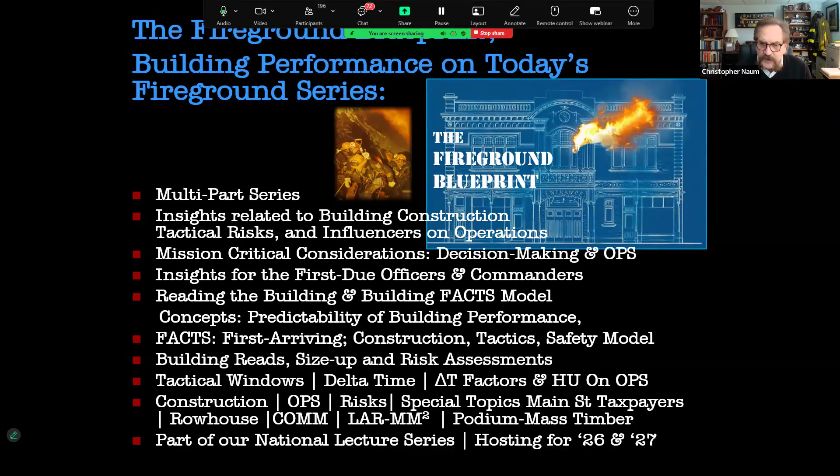Our program here, when we talk about the Fireground Blueprint, talks about building performance on today's fireground. It's part of a very large-scale series, one component of which is reading the building. We get into construction issues, tactics, operations, a variety of insights for both the first due officer and commander. We've developed a number of models dealing with the FACTS model, which we'll explain further.

Reading the building—many of you have become familiar with this concept and terminology. We actually were the first to originate that term back almost 25 years ago, in the late 1990s, early 2000s, when we first started blogging and doing online applications in the early days of social media. We'll talk about the predictability of building performance, and aspects of building read, size up, and risk assessment.

We will touch upon the tactical windows, which everything in today's fireground, especially building performance, revolves around the elapse of time. Keep that in the back of your heads. Integrated with that delta time, we'll talk about the importance of human performance related aspects on operations, construction risks, and other aspects.

Our program is just one very small facet—we're going to scratch the surface in this particular program. But this is part of our national lecture series. The only plug I'll make is that these programs, with a variety of different lengths in terms of time, duration, and content, are available for hosting throughout this year and into next year, '26 and '27.

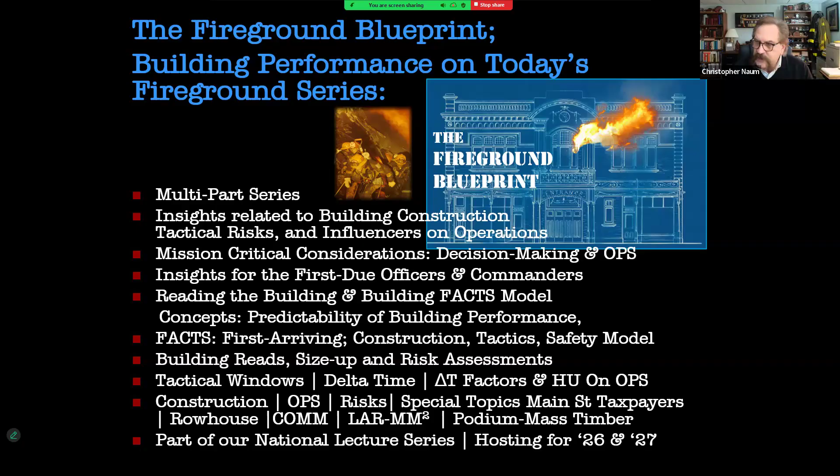Key items here in our overview: we're going to look at an integrated approach toward building construction. I think many of us are familiar with the standpoint that when we do have a presentation—whether an in-service or stand-up program, a conference setting, academic setting, or a drill setting.

Typically we hear the same type of content. The curriculum, the content, the types of things constantly discussed when we revolve around the focused area of building construction are pretty linear. They are not integrated into the other associated areas when we talk about operations, safety, and risk. And we're becoming more familiar with introducing fire dynamics within that model.

This is a very short form program, probably even shorter than I would have liked. We were talking earlier before we started the program—we originally built the presentation around a particular time frame, which I won't say as I look at the clock, but we introduced additional content over the course of the afternoon and expanded the program in a much more sizable way than time allows. So we may jump around a little bit as I monitor the clock as we approach the closing time frame.

We will talk about the aspects of the concept of predictability. I'll say this: all buildings are predictable if we understand the roadmap and the fundamentals drawn out of that. We'll explain how those aspects of modeling have a profound influence on our decision making, both on first arrival at the company level and on the arrival of the command officer who may be assuming command based upon the first due companies that have arrived.

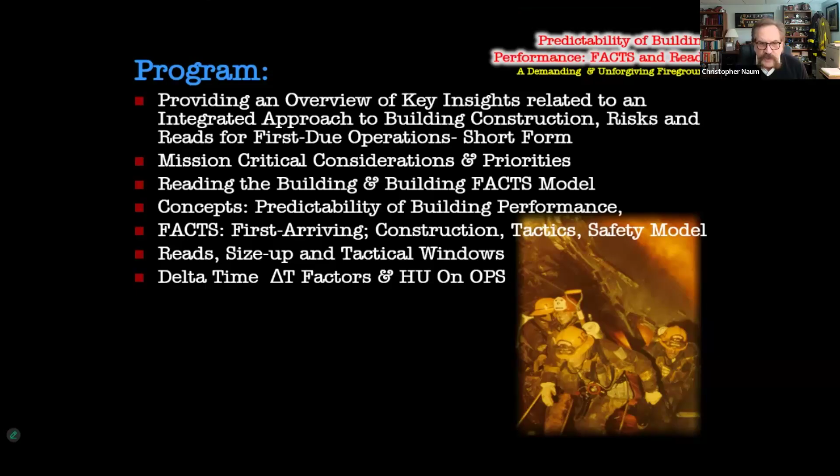We'll introduce elements here when we talk about tactical windows, the elapse of time or delta time, and the integration of human performance elements. Just critical thinking—expand your knowledge, skills, and abilities, and take this as an opportunity to reboot. We're going to talk about aligning and connecting the unique variables and the new perspective of operations, trying to simplify the complexity of the built environment.

One thing that is common when we talk about building construction, it is not certainly one of the most embraced topics on the fireground, but I'll say this, it is the most important topic when we talk about the structural fireground. If we're talking about fighting fires in occupancies and buildings, the most significant influencing factor in our decision making and tactical task level operations is to have a profound level of knowledge and understanding of the building we are engaging within. And I can't say that any simpler.

As I get warmed up here, it is the most important element, and it's also one of the most neglected topical areas within the fire service, and continues to be such when we take a look at all the other certainly important subject areas. But when we talk about showing up on the fireground, the easy thing is showing up, going to work, and stretching the line. The difficult and challenging aspect is doing that with critical thinking, conservative bias, and having both building and fire literacy. I'll talk a little more about that.

So we'll talk about methodologies and processes. And again, we're going to crawl before we run here. There's a lot of immersive information here. We're going to try to connect the dots, and there's going to be some soak time needed to be able to comprehend it.

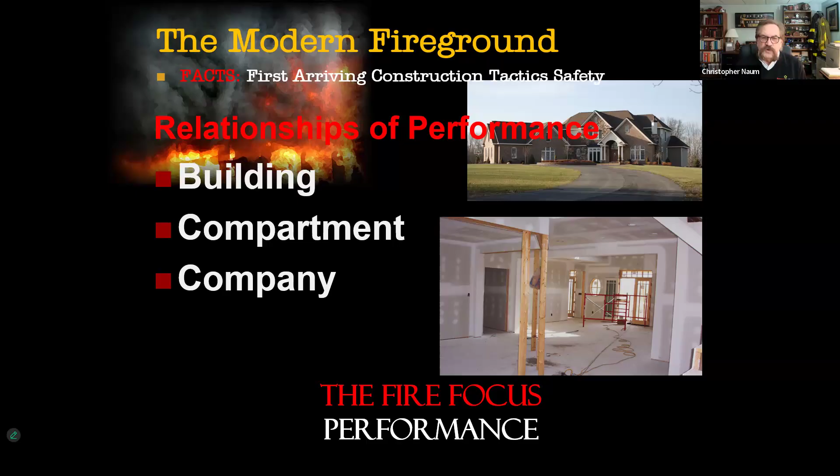And again, if we have consistency, there's a different variable that may be there. But in most instances, we have a tremendous degree of variables relative to human performance and the capabilities of the company. Thus, there's a significant variable that becomes part of what we do, how we do it, when we do it, and sometimes the things we shouldn't be doing on the fireground.

So it's important to take a look at that. And again, just a real quick look at the integration. We talk about the aspects of building performance, the compartment and the company.

All buildings have compartments, and the important other aspect here is the concept of resiliency. We're going to talk about identifying characteristics of the building's RIT. That has nothing to do with saving our own or firefighter safety, but it has everything to do with the predictability of performance of the building, because all buildings have a degree of RIT, resiliency, integrity, and time, the elapse of time, the integrity that's affected by fire, and how that plays out in some of the learned attributes that are part of that particular component.

The compartment is where we typically go, whether it be an occupiable type space or an internal compartment that may be a void or concealed area. Those are typically the location in which we have fire dynamics or products of combustion present. It's where the company goes, where we have engagement. And again, company, capabilities, resources, and risk. Those are very important concepts that we expand upon when we put these things together.

So when we talk about those elements, it's building, compartment, fire dynamics, fire conditions, three critical components of building, compartment, fire, and company.

When we talk about the aspects of the compartment, it's also important to note that many of you have become familiar with the perspectives and reads of the compartment and of the fire when we talk about reading the fire or reading smoke. This was an introduced concept that Chief Dodson was very gracious to identify and correlate, and then develop the modeling, and that has become a critical aspect relative to a fireground read. But we've expanded upon that.

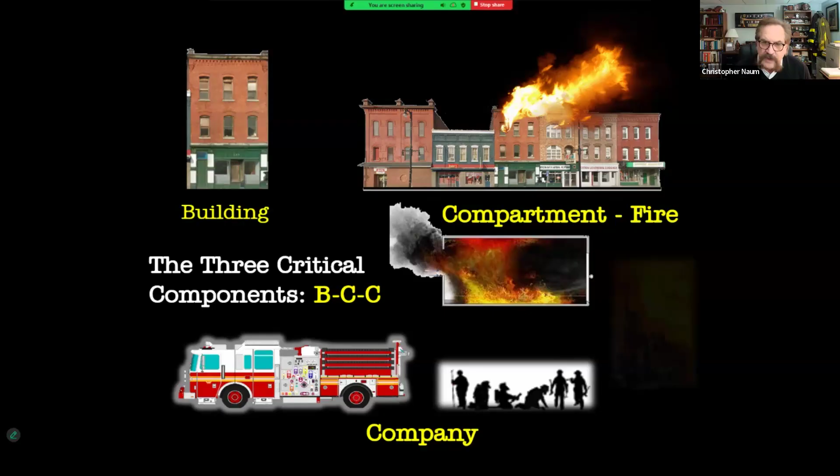When we expand upon that and take a look at how it plays into our building reads and risk, the other element here, part of the predictability of building performance, is the acronym BEAR: building anatomy, era, and vintage, the anatomy of the structure relative to a variety of different subsets, and the risk factors, the compartment fire conditions, the RIT, resiliency, integrity, and time.

And also the incident, severity, urgency, and growth, thus the acronym SUG. It's a simplified aspect to take a look at the conditions we are encountering upon arrival, the conditions we are projecting, and sometimes trying to postulate and predict based upon where this condition may be relative to the fire within the compartment, fire within the room, fire within the floor, fire within the building, or the expanding nature of that incident into other structures and occupancies that may be part of a larger footprint to the building.

Simplified aspects of building integrity, structural aspects allow us to operate in, around, on top, next to, or underneath the building, the aspects of RIT. There is compartment RIT, there's also building RIT. And again, severity, urgency, and growth, which we'll expand upon as we get into the program.

Company level knowledge, skills, and human performance, and then the aspects of time when we talk about RIT. Everything on the fireground has to do with the aspects of fire, products of combustion, building integrity, predictability, performance, as they relate to the elapse of time and our integration in that operation on the fireground.

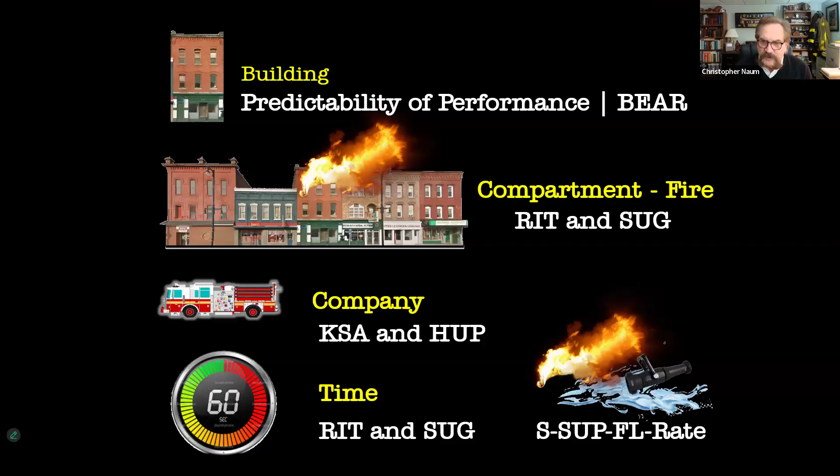And then lastly, the other aspect which is critical when we talk about fire suppression is the sustainability of having the adequacy of flow rates, when we talk about controlling the compartment, controlling the floor, controlling the building. So those relations are pretty straightforward. The building compartment relationships sometimes can be vague, or sometimes when we take a look at those factors, we can understand them very much so.

So something as dynamic as this, let's take a look at just a very quick video clip of a compartment fire, of a building fire, fire dynamics, the aspects we are learning more about in terms of the dynamics of fire, inlet, outlet, exhaust flow paths, and so forth.

We talk about the fire load packages, the building fire load, all of the other aspects that come together along with occupancy type and occupancy risk—another concept to introduce. So it's not just a residential occupancy; that residential occupancy may have inherent risk factors associated with other attributes we'll talk about here today, as dynamic as what we're witnessing.

When we talk about the dynamics on the fireground, whether older types of structures have a dominant resiliency and integrity over time, they allow us to do some things that were not time dependent. Sometimes we don't need a tremendous degree of knowledge beyond identifying the building, the type of construction, and other attributes relative to its building anatomy. We recognize certain fire dynamics conditions showing, and we normally put that together through varied levels of experience gained.

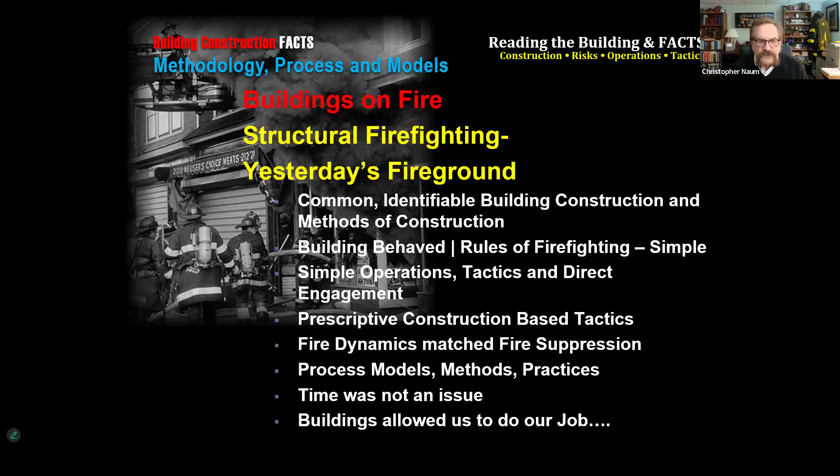Time was not an issue. Buildings allowed us to do our job. Personnel knew and did their jobs - proficiency, rigor, mission above all. Simple technology, manual brute force, physical exertion, determination - it was all about the job. We had time, we had people. We could mess up and still be alive. We could have errors and omissions and not know the job, and still get away with it.

We were slow to change. Change was discussed, debated, vetted, accepted, and then implemented. We embraced tradition while we were making it.

Today's fireground involves not only construction but building anatomy. This goes well beyond just the fundamentals of the five building types, and well beyond building construction. We're talking about building anatomy and all the attributes that go into that - the elements of functionality and the integration of those into this five and five.

I'm reinforcing how this is going to come together. These influence our operations, our tactics, our degree of engagement, and have an influence on civilian life safety. There's occupancy use and classification.

There's also occupancy risk. Recognize that a vacant building is nothing more than an occupancy use classification, which may have varied levels of risk associated with it. Once we identify, comprehend, and look at the other attributes, we can identify the levels of actual or perceived risk and determine our incident action plan and go to work.

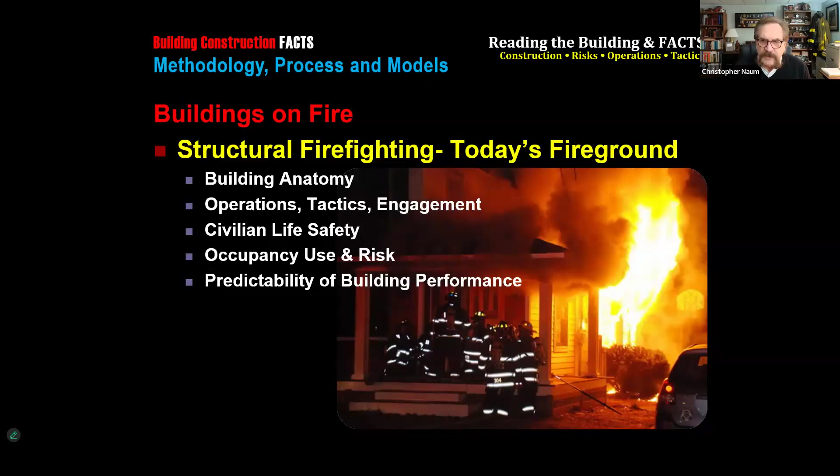These are things that once we identify the factors of predictability, they become our astute and defined roadmap that assists us in reading the building and figuring those things out relative to size up and operations. It's looking at fire loads, rate of heat release, understanding fire dynamics, the variables relative to engineering and architectural construction, the methods and materials of construction that constantly change, and sometimes the cost factors that went into that particular building that directly correlate back into other risk factors.

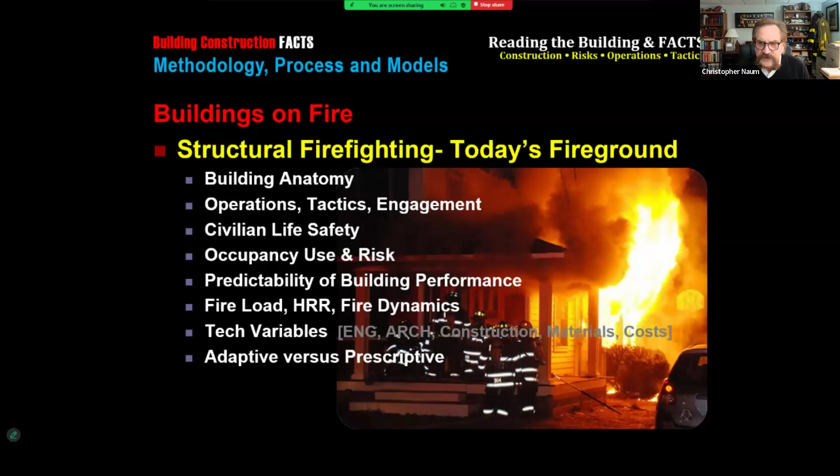We have to have a much more adaptive versus prescriptive perspective, and then the integration of process models, methods, and practices that work for your community.

So there are some elements here that are very definable, present in an urban or metro environment, in a first due, part of a battalion, division, borough, or entire city. But there are also things that are specific to defined risks that are part of a rural setting, either in the middle of nowhere or that four corners stop sign or single traffic light, in the suburban, urban suburban, outer wildland areas, coastal, seaside areas, all the way up to our urban and metro conditions.

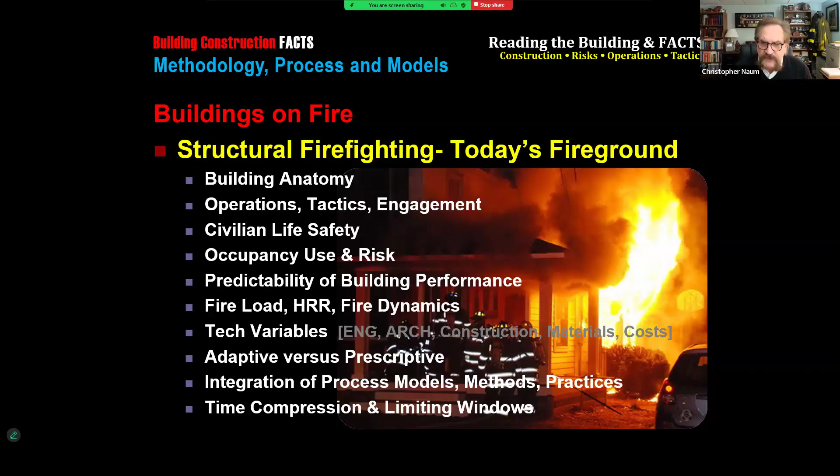Time compression, limitation factors, and the performance demands of our fireground. Yesterday's fireground versus today's fireground, we talk about those aspects. This is not the fireground or the fire service of the 80s, 90s, and certainly not the early 2000s.

When we talk about some of those demands and relationships, we talk about lessons, learnings, and insights, the historical context, the biases. These all have an influence on our conditioning and tactical reflex, whether it be correct, faulted, or inaccurate. But it does cause us to pause and take a look at how we've been trained, what we've been conditioned to, what kind of buildings we typically fight fires in, and what has been their resiliency and integrity, how much time have we had—is it unlimited, is it very narrow?

How does that relate back into the methods and materials of construction? How does it relate back to our size up? Is it cursory? Do we just follow a couple of bullets and go through the motions? Is it pre-programmed based upon our SOPs? Is it pre-programmed based upon the expectations of the fireground that we just do something, say something, and go to work as quickly as we can? Or are there meaningful and value-added insights that we are looking at beyond the cursory view of a building?

Yeah, it's a 2.5-story wood frame, but what about that 2.5-story wood frame? Are there additions? Are there add-ons? Is there something there that by age and deterioration, or additions, alterations, or exclusions, is going to be paramount and mission critical to what I may be doing on that fireground in the next 10 minutes? So we've got to take a look at those elements.

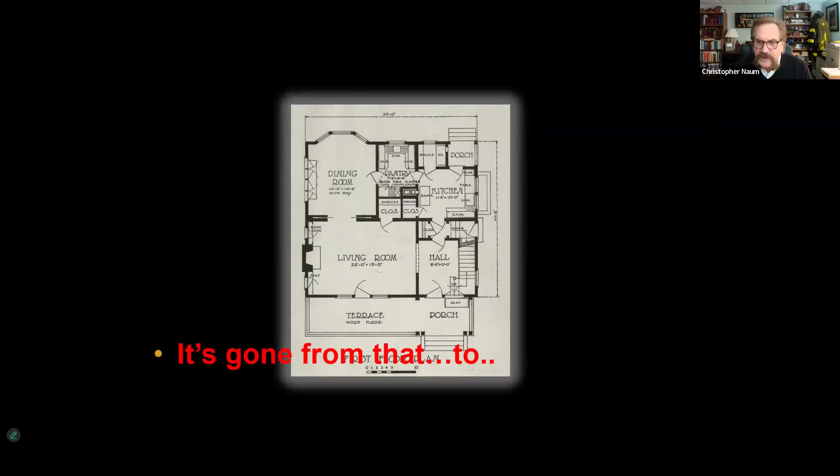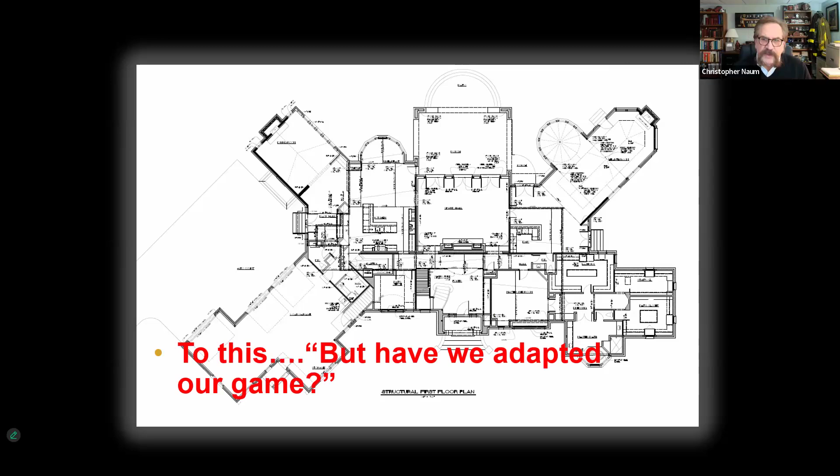When we take a look at the footprint of a building, at compartmentation, something that's pretty simplified and direct, it has become more complex. But have we adapted our game plan, our template? Do we have an understanding of how that plays out relative to our Fireground blueprint, our building anatomy, and also our building reads?

Just a couple of quick items. This is taken out of our mega mansion class that we do on mega mansions and large area residentials, but even just the evolution of the simple world of our buildings: 980 square feet back in the 50s, all the way to the common square footage and footprint of a residential of 3,200 square feet today. Many of you may have certainly much more sizable residential structures.

Just to give you some correlation, if we can classify, if we can identify the predictability based upon the anatomy of the building and other attributes that are part of the design, the construction, and the regional characteristics and conditions that may be present across the U.S., guess what? We can also develop the tactical template. We can identify the footprint, and then develop efficiencies in our building reads, identifying those conditions that are going to give us more efficiency on the Fireground.

So again, single family residence, the common ranges of 4 to 6, the upper ranges of 7 to 9. We can also tie that into what's called mini mansions. The McMansions primarily are within the criteria of the era of the 1980s when they were first introduced, and they were common to the 3,000 square foot footprint. Today, around the United States, there may be some differences, some very regional-based attributes of around 4 to 8.

Large area residentials may be commonly between 4,000 and 10,000 square feet. The mini mansion from 4 to 8,000 square feet, very regionally based. The mansion in its truest sense, based upon the federal estate taxation code, is between 11 and 25,000 square feet. And then we've introduced the concept of mega mansions, with attributes found between 25,000 and 50,000. The giga mansions between 50,000 and 75,000. And yes, there are tera mansions and greater around the United States, 75,000 to 100,000 square feet.

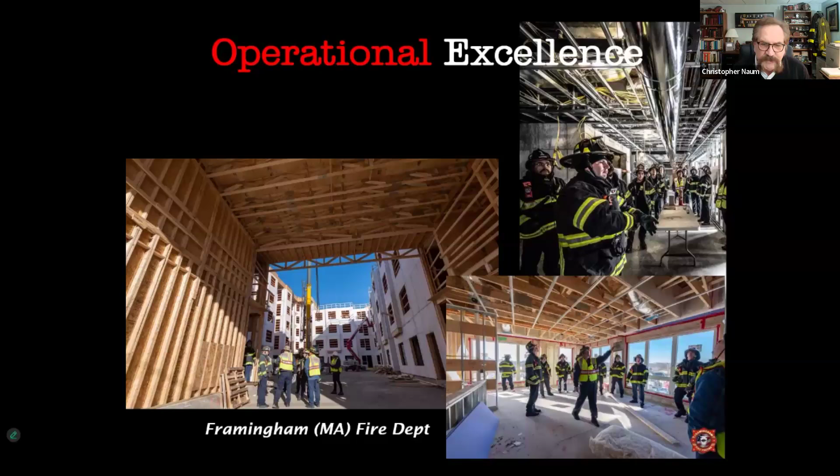Our good friends in Framingham, Massachusetts, again tremendous good leadership, taking our companies out there. We've worked and collectively seen some of the results of building knowledge and literacy by engaging in that type of environment and putting that all together.

Understanding intimately the built environment, the fire phenomena, integrating the elements, having technically accurate information, pre-fire planning. But again, it's at all stages, guys. It's understanding as the foundation and the construction sites are being built, all the way up through the various construction stages, inclusive of occupancy throughout the lifespan of the buildings.

All buildings are predictable if we have a model and understand the performance indicators that we are now introducing you to in this particular program. All buildings have a definable insight and focus when we talk about performance indicators. It's an understanding of the building's anatomy, understanding if we're looking at the structure and I ask the question: give me a type, tell me what the building type is.

Hopefully many of you are going back and forth between a building of type 3, brick and joist, or ordinary construction, or a building of type 4 construction. So if I was also to say that there's a new type 4 construction today that is part of the International Building Code, the International Fire Code, that identifies a modern type of type 4 that doesn't represent or look anything like our older legacy type 4 construction, dealing with cross-laminated timber or mass timber, you may be scratching your head saying, no, I don't believe it. But yeah, there's an entirely different type of type 4 construction now introduced that also leads to a hybrid type of structure.

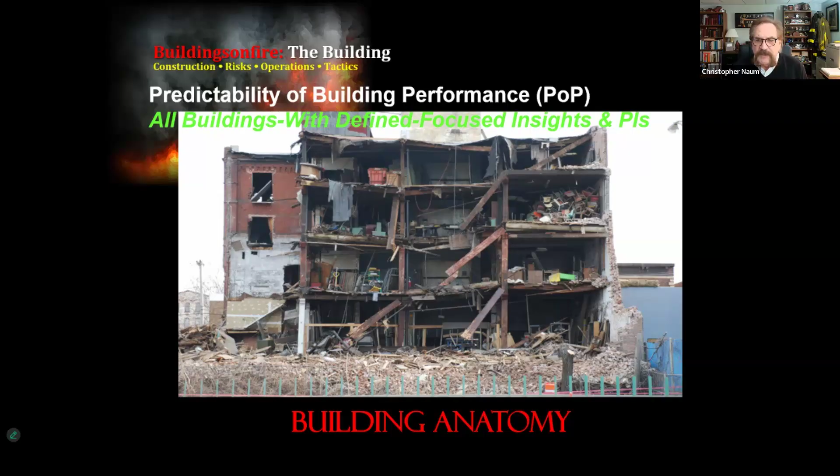So again, we go beyond the fundamentals of the 5 building types, understanding the building's anatomy, understanding and being able to look at a building and understand how it's constructed as this image is depicting, and being able to look at the building in this type of condition to understand that this is what's behind it. Understanding the anatomy, the construction, the materials and methods of construction, and then relating that back to how this building is affected by the fire dynamics, either identifiable on arrival, showing up on our reads and size-ups, or the things we discover that may be deep-seated based upon the footprint of the building, or within one of the critical aspects of the building, within the concealed spaces or voids of the structure.

Remember that part, because that particular element, concealed spaces and voids, is a critical functional domain in the building. We have building conditions that are seasonal, and we've got to be able to look at them during a variety of seasons that may be present throughout your jurisdiction, however long or short, in good or bad or inclement weather, and certainly the aspects between daytime operations and our building reads that are going to be very much present.

This is the obvious stuff, the things that we're going to see sometimes without really looking. So although we are looking, are we comprehending? That becomes much more challenging when we talk about the conditions between daytime and nighttime operations, and also the other challenges dealing with smoke conditions and other obscurity, other environmental factors that may be causing more challenges regarding how can I identify the critical elements of that building.

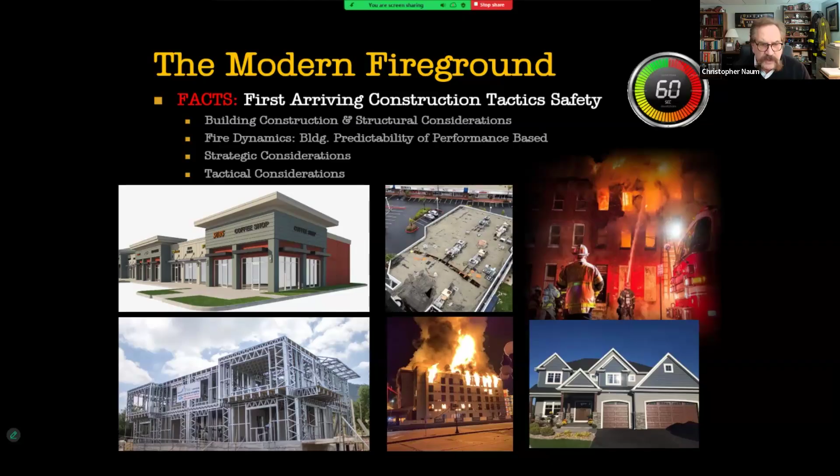When we talk about the variations of residencies, residential, commercial fireground, multiple occupancies, the challenges of operations, and the continuing evolving challenges of fire dynamics in a variety of both simple and complex buildings are creating very dynamic fireground conditions in which we sometimes have no clear definable go and no-go, but gray areas that become part of our size-up, part of our reads, part of our assumptions, and the accuracy of what we're assuming, constantly trying to validate as we go into operations.

In a variety of building types, occupancy types, age and vintage, we correlate that back into the human performance element of the adequacies of our companies. Am I responding with a one or two person staffed company? Dramatically different than going out the door with a 3, 4, or 5 person staffed company. But at the same time, I could have a 5 person staffed company, but the experience level, capabilities, and knowledge may be diminished. It may not be constant across the board, which may play out in terms of what we do on the fireground.

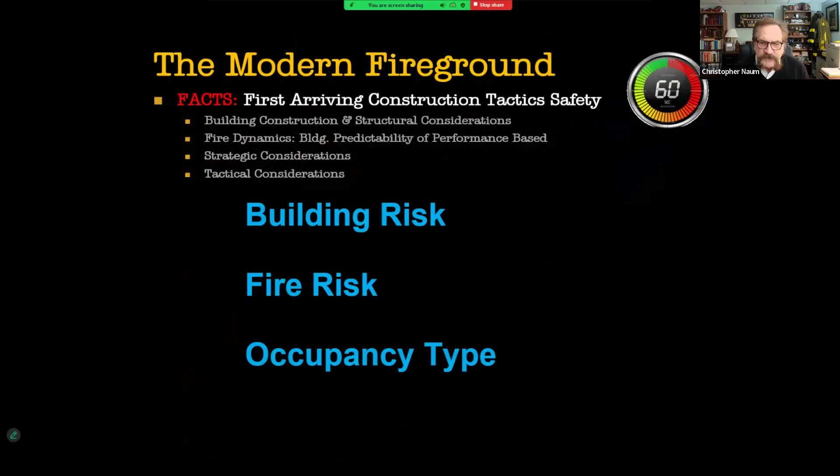And sometimes we do have go and no-go considerations, but we have to identify that. Do we have various types of operational creep where personnel are operating within collapse zones or other conditions sometimes defined by the lack of discipline and rigor present on the fireground and within the operational modes of oversight? But the aspects of building risk, fire risk, occupancy type, and occupancy risk are really formative as part of our operation.

I'll take a moment to give you some insights on the 1932 Fire Chief's Handbook that was published. This was the first textbook written specifically for the fire service. Published in 1932, it talks about the fire service profession, as referred to frequently in recent years. In the broad sense of the term, as practiced by the well-trained modern fire department, it may be so classified.

So again, they talk about the modern aspects. They talk about a number of different attributes, and even in 1932 they first talked about the aspects of size-up. They talked about safety, or life safety. They talked about the first line going interior, and by interior they mean - there's a whole variety of attributes that are written and developed right out of this particular textbook.

Size-up: a quick survey of the situation as encountered by the fire department upon arrival. They identified life hazard, property hazard, but also identified the importance of an initial action plan based upon the first arriving officer, who rests the heaviest responsibilities. They also started talking about type of construction, the development of fire within each type of construction - very specific characteristics - sizing up the building's height, characteristics of construction, and the important aspect of openings and exposure conditions.

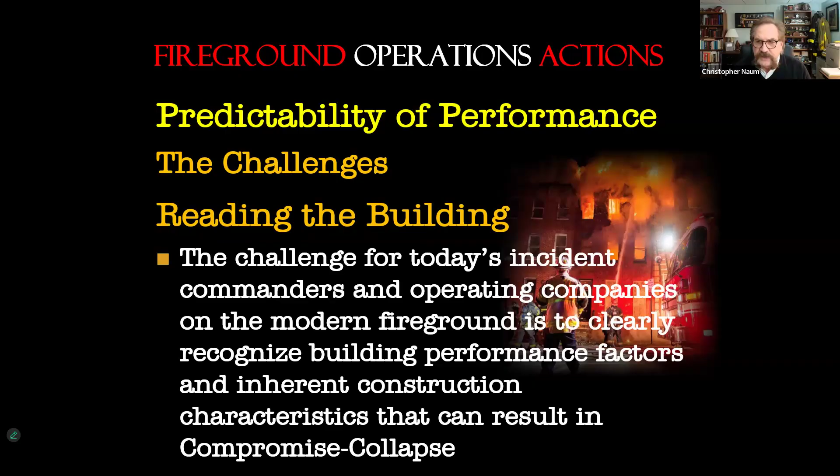Command officers and assigned personnel, depending upon roles and responsibilities, sometimes cannot comprehend the relevancy of observations or communications, or cannot observe mission critical conditions or performance indicators relative to the challenges of smoke, weather, darkness, concealment, obstruction, design, or proximity or location. So sometimes we have both mental and physical obscurity. We don't understand the communication when someone is telling us something because we don't have that degree of literacy. That becomes part of the challenge.

Predicting adverse fire behavior and potential structural compromise or collapse is one of the most challenging tasks facing first-due companies and commanders at a fire. Usually the lack of information on the construction of the building, the fire size, fire location, fire burn time, conditions of the building, the fuel load, etc., makes the task nearly impossible.

However, when key building considerations and fireground indicators are presented, recognized, and identified for their relevancy and importance to the operation and to operational safety, they can dramatically influence operational outcomes. So it's not always impossible, but we've got to develop empirical insights relative to the occupancies and integrate that into our combat fire engagement plans, relating to construction, occupancy, performance, materials, systems, and time.

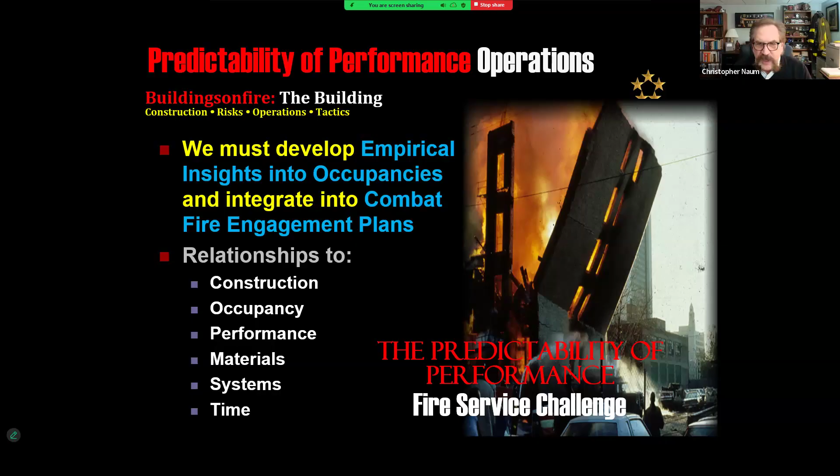So, all right, with that being said, let me fast forward to some of the key takeaways. So when we talk about predictability and building reads, and again, the comprehension, the understanding, the application.

If I show this particular image in fireground operations on the East Coast, I'm going to get a certain perspective. If I show it on the West Coast, of which this is a depiction of fireground ops in a building of bowstring construction, oh my God, the world is ending. We're having some heartache, and some keyboard warriors are having a fit about what are they doing on the roof.

But again, there are predictabilities based upon attributes of the building, the reads, the functionality, the structural elements here, and more importantly, where are they located. So a lot of what's drawn out of risk is going to be based upon where and how these buildings are built in your jurisdiction around the various areas of the United States.

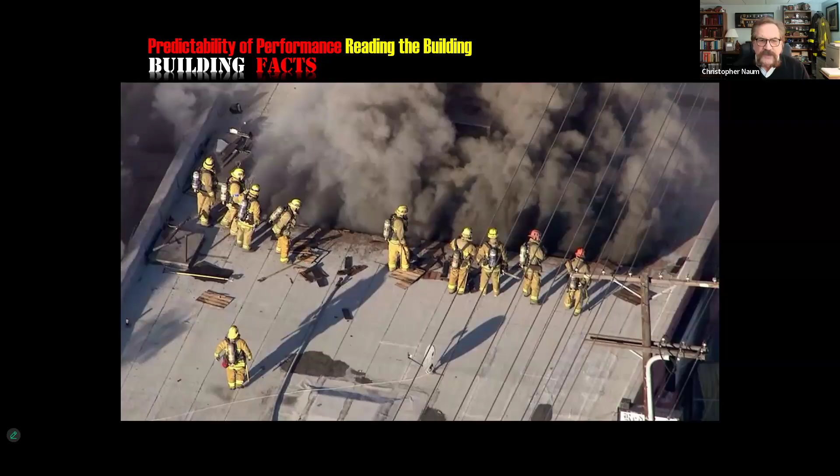So yes, we can perform certain functions in certain locales if we have an appreciation and understanding of the building's anatomy, the aspects of the occupancy, the collapse and compromise characteristics, the methods and materials of construction, and the fire dynamics that allow us to have conditions that are mitigated, under control, and able to save property and hopefully save lives based upon the inherent fireground conditions.

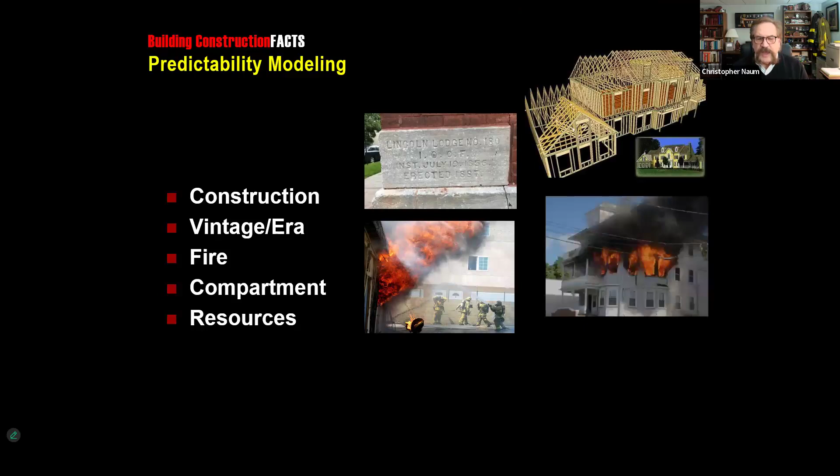It all has to do with construction, vintage, and era. It's understanding the fire, the compartment, and those levels of resources. When we correlate that back into the operational aspects of our reads, we go back into the functional area of the 5. This is the important aspect here that ties into fireground reads.

It's trying to identify the building's anatomy or structural systems, identifying inherent collapse and compromise characteristics. It's looking at the occupancy type, occupancy risk, and other subset characteristics. It is the identifiable methods and materials of construction that are part of the construction era and vintage of the building, going back up to the first bullet.

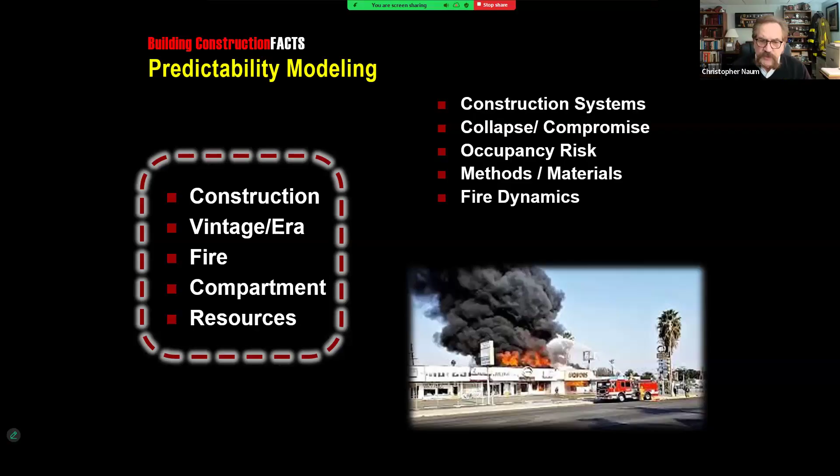And then it's also the fire dynamics that are inherently characteristics of, that are learned and sometimes assumed in buildings that we may not have experience level in. But those 5 fundamental areas have everything to do with building reads on today's fireground. This ties back into our BEAR acronym of building, era and vintage, structural anatomy, and the levels of corresponding risk. These are the influencing factors that are part of our FACTS model.

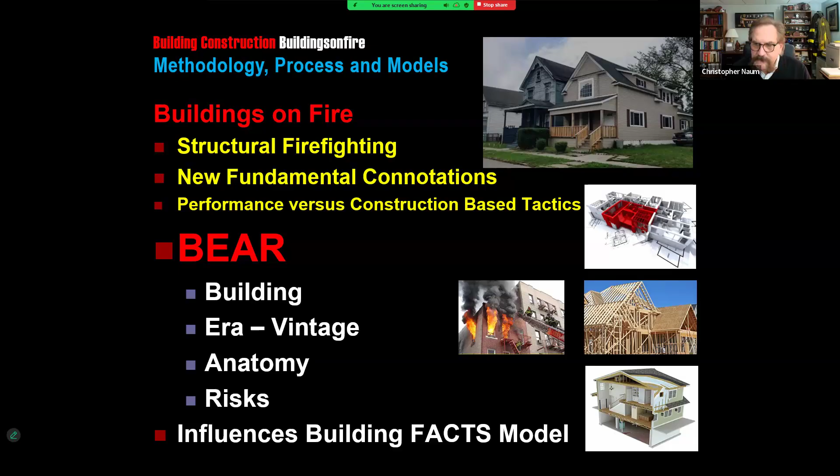So showing and getting into the specifics of the building read, let me fast forward here to this. So here's the 5 and 5 that are critical to our size up in our modeling.

So the building domain reads are relative to identification of, again, structural anatomy, era, and vintage of the building, of which there are some subsets. Occupancy type and occupancy risk, collapse and compromise characteristics. Sometimes they're negligible, or they may be very, very significant based upon what?

The building's anatomy and occupancy type and risk. It's the methods and materials of construction that are either identified or are part of the understanding of the predictability of building performance that are learned, that are assumed, and sometimes predicted and/or validated in our operation. And then it's the correlation of fire dynamics within that particular compartment and/or structure.

The 5 functional areas that one looks at are pretty straightforward. It is the roofing systems. It is the building's perimeter walls. It is the floor and/or ceiling systems in multiple floor structures or occupancies.

And again, the last part that I made mention earlier on, it's the identification and appreciation of concealed spaces and voids. Those 5 and 5 are the most critical fundamentals that are part of our FACTS model that lead into the development and refinement of building reads in certain occupancies.

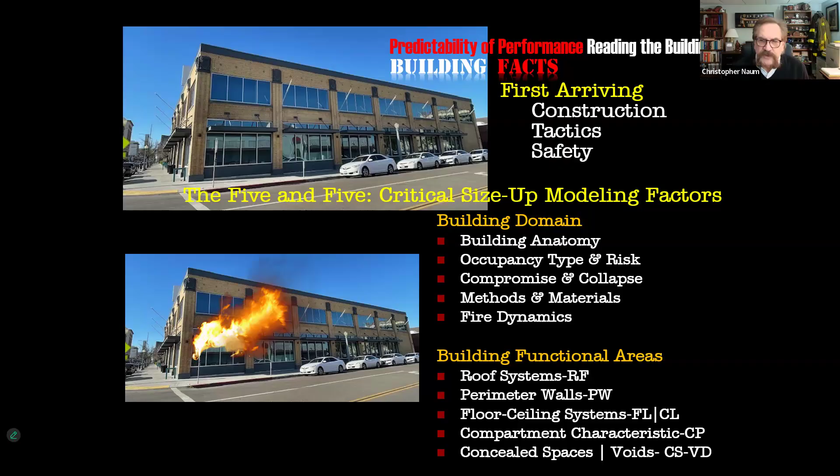So these all fundamentally end up being drawn out of the type of structure relative to when it was built, the occupancy type and risk, and that are drawn out to this 5 and 5. So graphically, this is what the representation looks like, of which there are some subsets and bullets that we would get into a little bit more in detail.

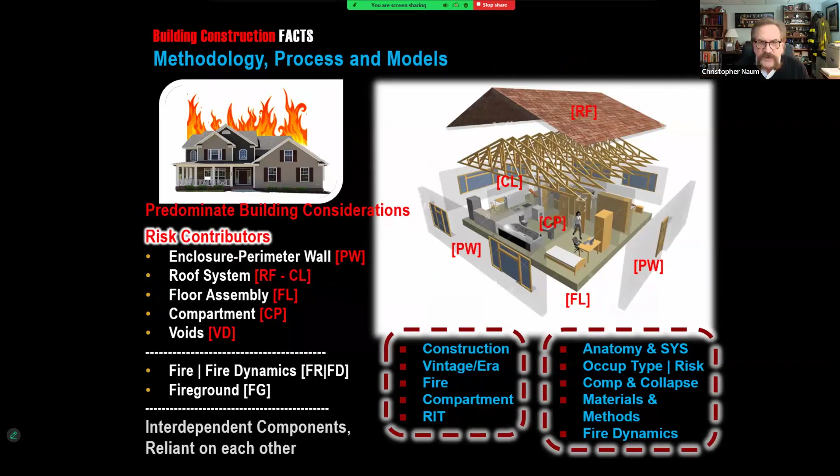And then the contributors there, when we talk about those domains, we get back into, again, the enclosures of the perimeter walls, the roof, floor assemblies, the compartment, and also the voids and concealed spaces of that structure. These all come together when we start looking at era and vintage.

Again, our era and vintage is very definable. These correlate back specifically to how buildings were designed and constructed in these various eras of time. We have the modern era from the 1980s to the 2000s, and the 2000s to 2026, the 50s to the 80s, the 1900s to the 1950s, the 1850s to 1900s, the 1800s to the 1850s, and all the way back to the 1700s to the 1800s.

So there's some very definable considerations on our buildings of type 3 construction or residential occupancies in the 1800 period. The Civil War era gave us very definable characteristics that changed dramatically in the 1850s, 1860s that are very identifiable, that correlate back to building performance, that are identifiable on size-up that one learns and then thus applies.

So we have both what we call old heritage and new heritage construction. Our legacy construction is the period between 1900 and 1950. This goes against what UL refers to when they talk about the legacy period—it's primarily from the 1980s going backwards. But again, there is such a vast level of insights that are drawn out of vintage and era related to building characteristics and predictability, that are learned, that we are not talking about nearly enough when we size up our buildings in these different eras and periods of time.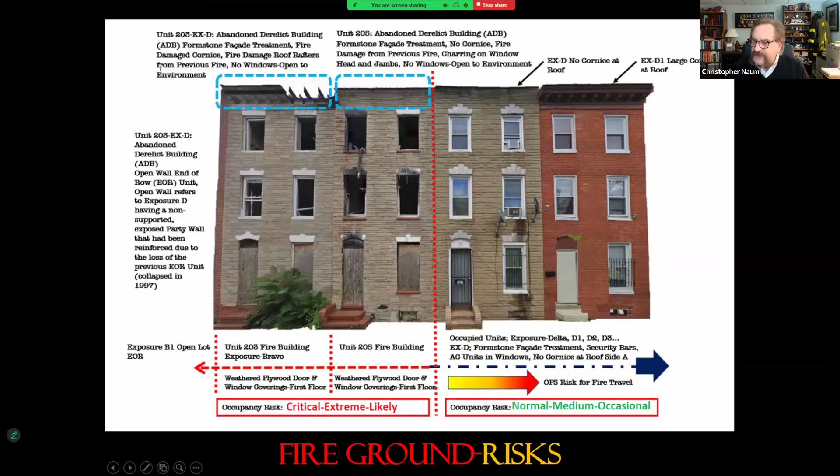These all fundamentally go together when we talk about looking at our buildings, identifying size up considerations and factors, putting that together relative to Fireground operations and conditions, and having that available within the dynamics of our fire situations that we're encountering in a whole variety of building and occupancy types.

There are significant challenges that all go back to the training. I think it's safe to say there is a very dominant challenge when we talk about building and fire literacy. We typically have sound bites of information that one gathers, and I would certainly venture to say that many of you are somewhat challenged even as we talk about these particular aspects.

It goes beyond the fundamentals of type 1 through 5. It goes beyond the basics of an occupancy type. We can talk about residential occupancies that are 4,000 square foot or 6,000 square foot built in the 1940s that have an entirely different occupancy risk and characteristics and sizing up when we talk about a 4,000 or 6,000 square foot residential building built in the 1990s or the early 2000s.

So there are a lot of different elements there that one would get into, that we would have discussions on and correlate that back into. Two other important slides I want to show you here before we get into the Q&A section.

One of the aspects regarding a simplified approach on size up, when we take a look at life safety, it's specific to our occupants. We talk about severity, urgency, and growth of the fire incident or conditions that are present. It should lead us much more to an adaptive Fireground action or model.

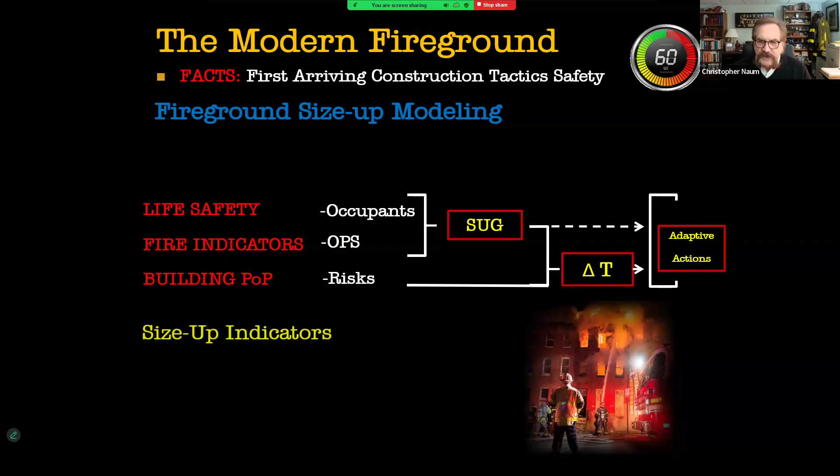Again, size up indicators, the methods and materials of construction that are present, again result in decisive actions, the elapse of time, having an orientation, understanding human performance, critical thinking, conservative bias, having a dynamic posturing, having a predictive plan at least two deep.

In other words, we need to be thinking about our operations for that 10-minute window, but what about the next 15 to 20, the next 20 to 25? So again, if we encounter an unexpected condition, such as a fire behavioral related challenge or a building compromise or integrity factor, we've got to have plans in place that are predictive and ready to be implemented.

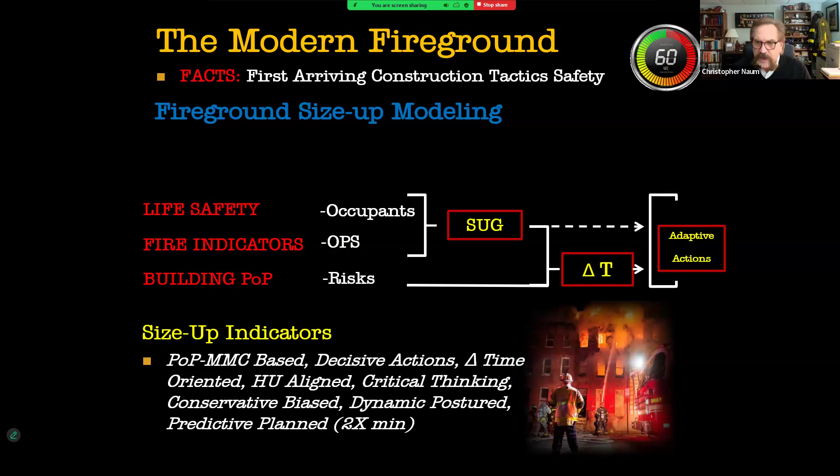Based upon the resulting conditions. The other remaining aspect here when we talk about fire dynamics in terms of the 10-minute window - I'll just show you a quick graphic here. That 10-minute window revolves around, again, arrival time. We typically have an operational period of around 6 to 8 minutes of engagement.

There may be some imposing factors. There's some reflex time to get from curbside into the building. How much square footage can we cover by our companies based upon the availability of resources? How much gallon per minute flow rate if we have an encountering fire? We're looking at imposing factors.

We're assessing, looking at severity, urgency, and growth. We're looking at risk, and command primarily is imposing upon that 10-minute give or take window. It's a benchmark to determine what the next 5 minutes of operational period may give us.

So there's a lot more that we can discuss. We've actually talked about this rather extensively on some of our postings, where we got into some details that go well beyond the 20-minute window that some departments still utilize, and other departments have no Fireground performance indicator, 10 minutes or less, 20 minutes or greater.

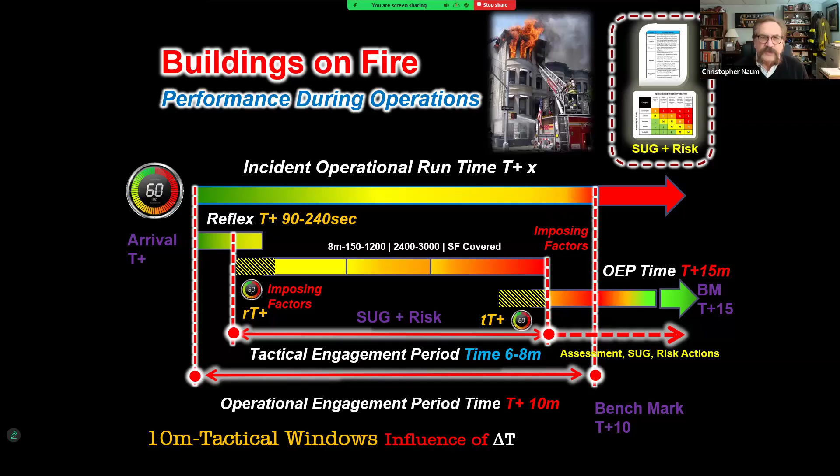The benchmark and the performance indicator is fire under control or fire out. And hopefully the building and the occupancy has allowed us to function and perform in that capacity.

And then lastly, I will just show you the correlation of some of these aspects when we get into some risk factors. Some of you may have some go or no go criteria, but based upon some of our modeling, and again, it's somewhat based upon the square footage and building sizes.

But if I have a building that has 25% or less fire engagement, and I'm utilizing the 10-minute window as my benchmark, and assuming that we have 10 minutes of operational time, and that fire is not controlled, and I'm assuming that I'm losing another 25% or so of building integrity, I still have potentially upwards of 75% of building integrity available. I have maybe lost an additional 25, but I still have maybe 50%. So that primarily gives us the ability to operate at risk, but more of a green go consideration based upon risk, based upon severity, and some other operational factors.

If I have 50% or greater involvement of compartment, floor, and or building, based upon characteristics of building, occupancy, era, vintage, and what have you, and I have a 10-minute window and potentially lose another 25% of that building's integrity, either by assumption, prediction, or actuality, I now have less than 25% of building integrity or RIT available in that 10-minute window. That places operating companies at a very high level of risk with a high likelihood of compromise or catastrophic collapse.

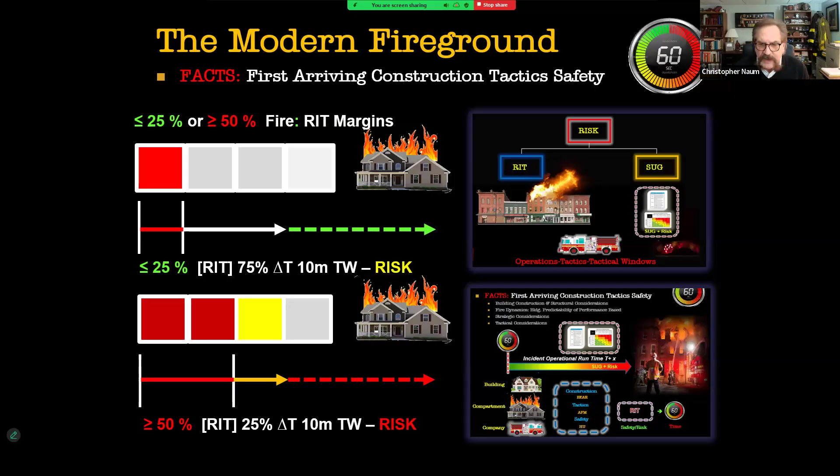So some quick insights that provide perspective on that, which gets into other aspects of RIT that we didn't have a chance to get into. There are conditions that go well beyond what Brunacini gave us back in the early 1980s about RIT. This is drawn out of insights from the NIOSH F 2012-13 report on a double line of duty death in Philadelphia.

All of these elements come together and really challenge our operations. We've got to maintain that vision going forward and look at the risks associated with our buildings on today's fireground. In your first due, it may not be some of the things we're talking about here. It may be mega mansions, old residential construction, multiple occupancies and townhouses, a variety of new or old construction, derelict abandoned buildings, or everything in between.

For many of us, we are experiencing challenges we've never seen before due to the continuing introduction of new methods and materials of construction, new building types. The biggest challenge is hybrid constructed buildings that may have a dominant construction method and materials but act like a different type of building. They may look different, which becomes part of the challenge. It becomes important to look at outside and interior to put these things together. There's a lot of moving parts.

If nothing else, take away some insights relative to the RIT concept of building, the introductory concepts of building facts, and how the first arriving unit's understanding of construction influences the tactics that influence safety and risk of our operations.

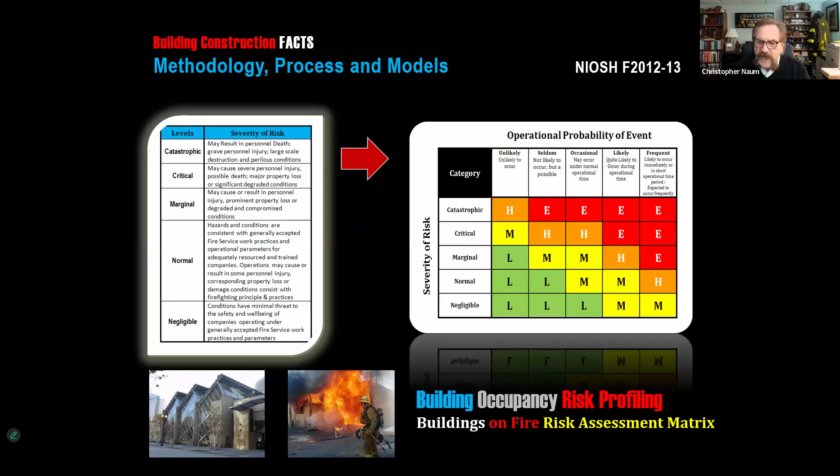So we've got to put a lot of things together. I sincerely hope you've gotten some insights out of the brief period of time we've spent here.